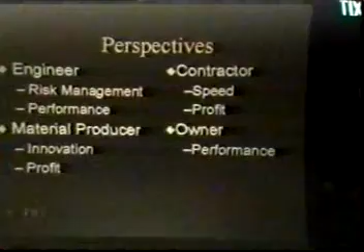I'm going to be talking from a contractor perspective. As you can see on this slide, there are many different perspectives that will be given to you today from the material people, the engineers, the contractors, and some owners. And certainly these perspectives need to be understood so that you can understand the biases.

Everybody has a bias in this business. The owner wants the cheapest, most effective repair. The contractor wants speed, he wants to make money. The engineer is concerned about the risk of his design, he's looking for performance. And of course, the material producer is looking for innovation, the one-upsmanship. He's got to develop technology that he can sell, and he certainly wants to make a profit like all of us.

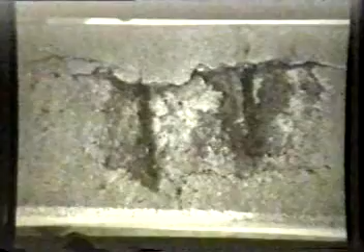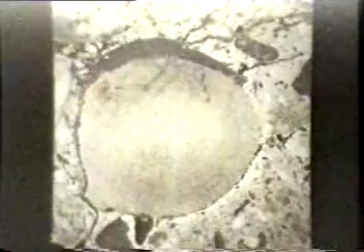This whole business about corrosion and repair starts with this type of thing, pretty common in most parts of the country, most parts of the world. It's all about this rebar and other embedded metals, where these metals want to go back to the way they were found in the earth to begin with, as an ore, an oxide. And these oxides expand, as you can see in this particular slide.

That's the corrosion product that we'll be talking about for the next 2 days. This corrosion product expands and creates tremendous forces, and these forces are tremendous, and they can do what you can see here. They can delaminate the concrete, and that's what this is all about.

As Joe Solomon said earlier, this is billions and billions of dollars being spent by us, the owners of these structures, to fix and repair them. So it's a great business. If you're in this room, most of you are profiting from this repair business. We develop technologies and materials to fix these things, and you're going to hear a lot about this today — the effect, the spalling, the corrosion, all kinds of strategies, means and methods and tools.

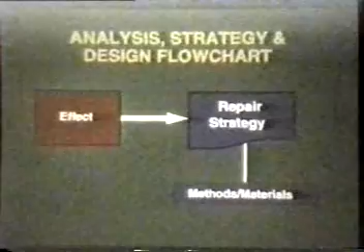It's pretty exciting because there's lots of neat innovation going on in this business, and a lot of it's related to the corrosion issue. We're going to be spending a lot of time this morning just talking about some of these repair strategies, some of the things we're doing, and I'm going to raise some questions and food for thought, because there are lots of issues with these different technologies. It's important to understand these issues so you, the user, can ask the right questions when you're presented with an opportunity to use some of these technologies.

We've learned a lot about corrosion over the years. We know that the corrosion process isn't just about water. It's amazing how many times, back in my earlier years in this business, I thought you needed water getting into the concrete, that water was causing the corrosion. Water is just a part of the process.

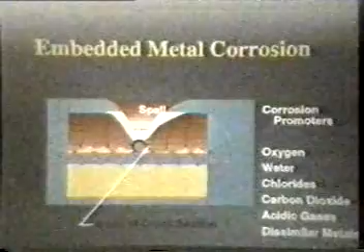Certainly oxygen and water, but we've also learned that chlorides and carbon dioxide are the two key elements. So you need certain things for this reaction to take place — that's something that we've learned.

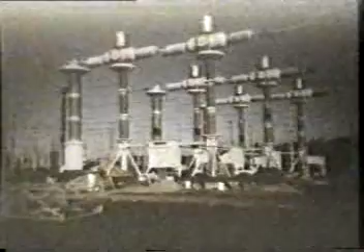We've also learned that this process is an electrical process, something that's really at the fundamental level very hard to see. These are electrons flowing, and we're going to hear some of the theory from some of the speakers later today and tomorrow. I know Dennis Pinnell and Gordon Gu are going to talk a lot about the theory and some of these issues, so you can understand — or get confused, as I do — when talking about electron flows.

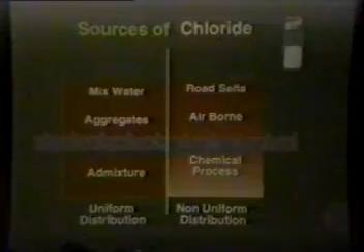We've learned a lot about these chlorides. Chlorides are great for our business, and we've learned a lot about where they come from. Some of it's coming from the outside, like road salts—where we have cold weather, we put a lot of salt on the road, and that comes into the structure via vehicles and so forth. Some is airborne. If you're on the ocean front, salt water—we were just talking before the meeting in Hawaii, they've got all kinds of airborne salts in the air. They also have a lot of aggregates they use in their concrete mix that have a lot of chloride in it. So we know there are different sources of salts that get into the structure.

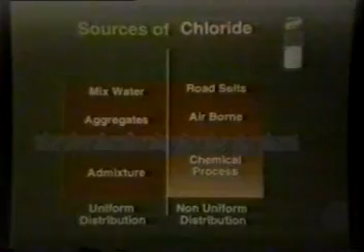We've learned over the years that the wonderful admixture used to accelerate concrete, calcium chloride, has created a lot of nice work for us. Most areas of the country prevent the use of those materials where there's going to be reinforcing steel. But in other parts of the world, we still see some use of these materials because it's a cheap accelerator.

We've also learned, maybe we're the latecomers in the United States, about carbonation. In Europe and other parts of the world where they have more mature structures, we know that carbonation, the gas in the air, is causing a lot of problems. It's a natural event that takes place where the alkalinity of the concrete, the natural protection for the reinforcing steel, is being lost to this acidic attack.

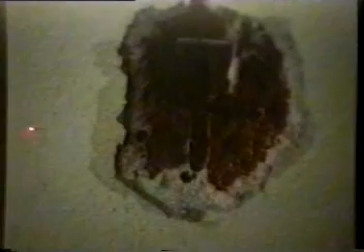This is a coating on the surface. It's really interesting to note that carbon dioxide goes right through this coating, right through this mortar surfacing that levels off the surface, right into this concrete, and travels right back into the concrete. It's looking for this reinforcing steel. Once this carbonation level reaches the reinforcing steel, you have lost the alkalinity, the natural protection. So now water and oxygen can cause corrosion.

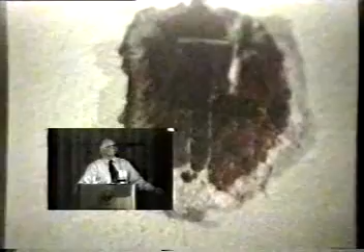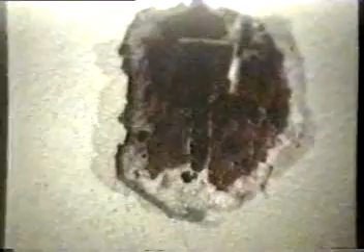You can also see that this crack on the surface, which penetrates the slab, allows the carbon dioxide to penetrate deep into the structure. You can see the white area around the reinforcing steel where the crack crosses that bar. So we've learned a lot about that in the United States, and that's going to be a future problem we need to be working on. Certainly this exists today in the United States, but we're going to see a lot more of it in the future. There are some new tools available.

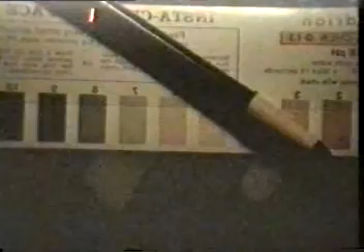This is something we recently found—a pencil. It's a simple little pencil, and you rub that across the surface of the concrete, and you check the color, and you can check the level of carbonation. Pretty neat—you don't even need to spray chemicals.

Something else we've learned about these materials, the chlorides and the carbonation, is that you can run tests individually on the carbonation level and on the chloride level and find out they're both within acceptable limits. But if you add them together, you have a tremendous synergy between the two. So you can have a very high pH where the concrete would come out pink in the phenolphthalein test, and have very low chloride content. A low chloride content by itself would not promote corrosion, but add the two together, and we have tremendous levels of corrosion taking place.

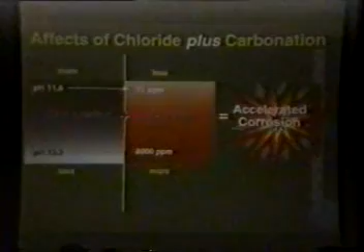So it's very important to find out exactly what the levels of these two things are in your structure if you're doing an investigation, because we've seen errors where they look at the chloride content alone and find out the structure is just fine, and don't really treat the cause of the effect.

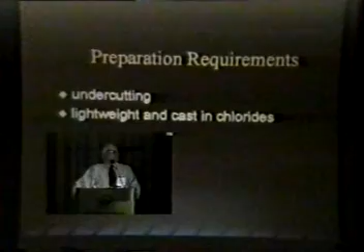I'd like to talk about preparation. Probably one of the most important things we've learned in the last couple decades is preparation. Preparation can lead to very successful repair work.

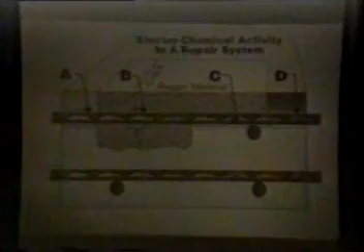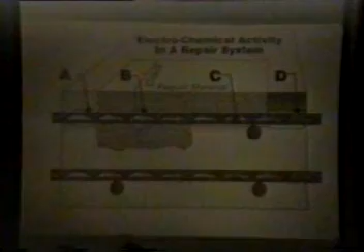I'd like to talk about a couple issues. One of the things that was pretty prominent in this business a couple decades ago was we didn't chip behind the bar, we just knocked the loose stuff off. You really didn't need power tools. You'd go on the surface of the building, take a mason's hammer, knock the loose stuff off, then go with mortar and trowel it back. No power tools, maybe some wire brushes.

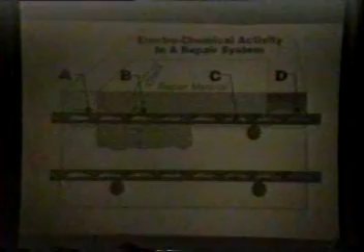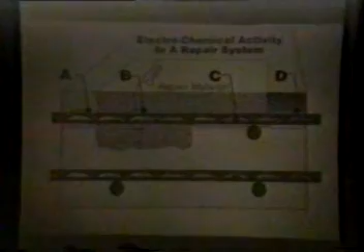These type of repairs, where it was done without chipping behind the bar, failed. Anybody in this business has seen this. One of the things we've learned is you've got to chip behind the bar. One of the first guidelines this association put out, back in '89, was the preparation guide for reinforcing bars that were corroding. This guide talks about chipping behind the bar. It really has helped the industry move forward.

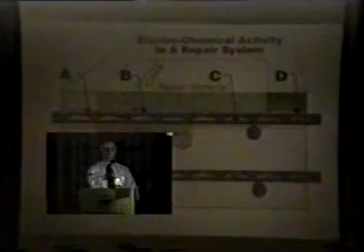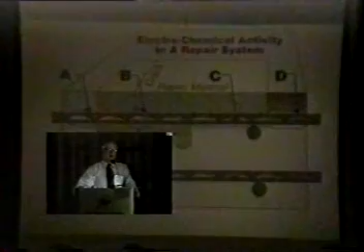You go to other parts of the world, like India for example, and I've talked to contractors and engineers over there - they don't chip behind the bar. Their repairs don't last. So it's a very important issue that we've learned, and we should not forget it. But it does cost money.

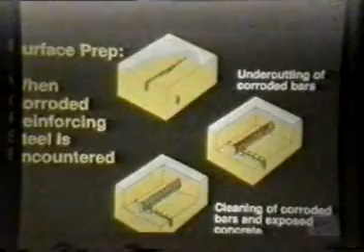And if you haven't seen these guides, they're available out on the table, and certainly you can take them with you for a few bucks.

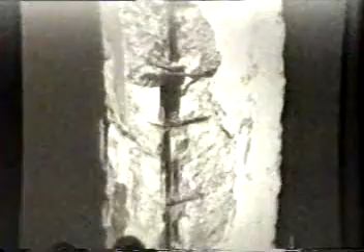This is a typical example of the type of problems you might see out there, where the tendency, if you want to do it at low cost, is just knock the loose stuff off, wire brush the surface, and trowel it on. If you do that, you end up with things like this. These are very short-term repairs.

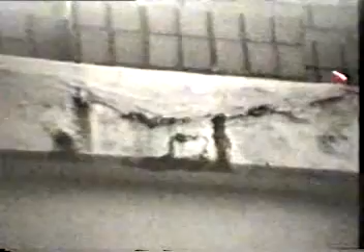This repair was done without chipping behind the bar. It lasted no more than 2 years. These are very tempting to an owner looking for the lowest cost. In this particular structure, the owner had to do repairs 3 times before he decided to spend the real money and do the job right.

These are just some more examples of what it looks like when repairs fail.

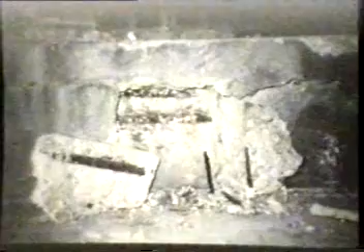Another thing I'd like to talk about in preparation - as a contractor, we've been put in a vice. We've been asked to bid these jobs lump sum, which is a very risky business. We go out there on these lump sum jobs with a hammer, sound the surface, and do a delamination survey. We get a quantity from the delaminations and put our price together. We add 10% to those quantities.

Well, in the last couple of years, we've been burnt. Almost every time we do that, we get burnt because we end up with these structures. This particular structure is typical, maybe of other types of structures too.

Typically, if you're using lightweight concrete in your structures, the delaminated area - the area that's hollow from the pressure of the expanding reinforcing steel - is not indicative of the level of corrosion. Many times in these types of structures, the lightweight aggregate actually absorbs the corrosion product. It's absorbed into the lightweight aggregates, which are very porous, so it doesn't build up the pressure to cause delamination.

So you can do a delamination survey and think you've got a reasonable area for repair, and then you go out and start chipping, follow the corroded bars, and your areas might double. Something very important here: if you're an engineer doing the survey or a contractor bidding on this work, you really need to understand what type of problems you have. Maybe a pilot test may be appropriate.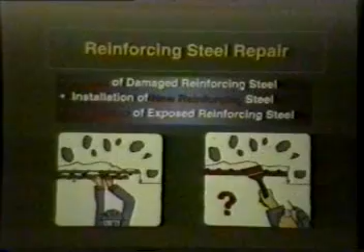We talk about reinforcing steel. Once we've exposed these things that have caused the problems, there's lots of issues, and you're going to hear a lot about it in the next couple of days. The repair of the bars, the coatings - there's all types of products on the market that repair bars. But first, before I talk about repair, I'd like to talk about new construction.

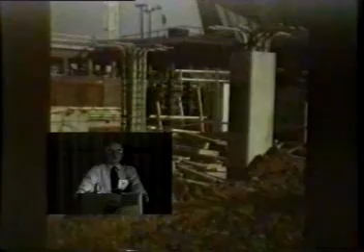New construction, over the last 20, 30 years, has developed technology to prevent corroding bars. In the 60s and 70s, they talked about galvanized bars, and then in the late 70s they started transferring the technology to a fusion-bonded epoxy coating. The value of those systems was to electrically insulate the bars, so if they're electrically insulated, we couldn't have an electrical process going on. That's pretty much the state of the art for new construction in bridges.

Certain states have banned the use of these technologies because they've had some problems. I think the state of the art right now has advanced to a point where, as you can see in this particular case, they use epoxy-coated bars in the columns, and the ties are uncoated. I still haven't figured out exactly why that is.

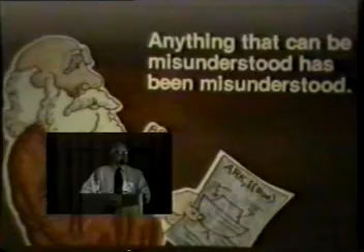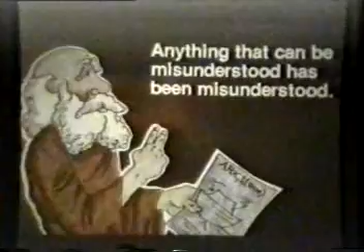I think that's true with a lot of technologies. We start applying these technologies, and then they start getting abused and misunderstood. And that's somewhat happening on our repair side. In the repair side we have a lot of issues, and I'm going to talk about a few of these.

The first issue I'd like to talk about is repair. A repair is part of the structure, not the whole structure. There's a big difference between new construction and repair. And you can see this bar has been exposed.

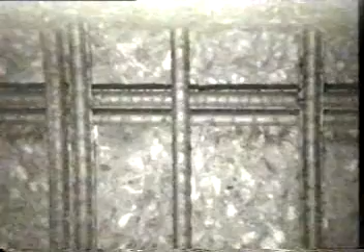This particular specification required white metal. That's why it looks so clean. If you ever try to blast a bar to white metal, you'll realize how hard that is to do. It's almost impossible. But think about this bar.

You can see this bar, but then it disappears. But there's a bar in that concrete, and what I'd like you to do is visualize that bar as being continuous. So it's kind of ludicrous when you start to think about it. In new construction, we want perfection of these epoxy-coated bars from end to end, tip to toe, stern to bow. But in repair, we can only hit the bar in the repair zone.

So does it make sense to encapsulate a bar in that repair zone and leave the bar uncoated as soon as it leaves the repair zone?

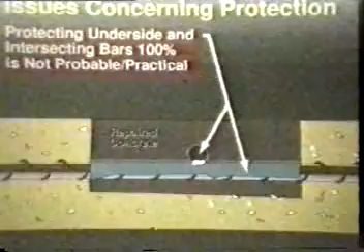And then we deal with the constructability of that. How do you coat it? I'm talking about epoxy coating now, where epoxy coating is an electrical insulator, and for electrical insulators to work, they have to be perfect. If you have a pinhole in it, you concentrate electrical currents. So an engineer that specifies this wants a pinhole-free, perfect coating system.

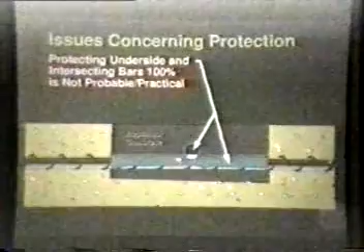But as a contractor, I can tell you it's very difficult to do this. On the back side of the bars it's very difficult. Where bars intersect, you have two number 8 bars lapping each other. You know how difficult that is? It's almost impossible. They're touching. There's going to be a gap there, uncoated.

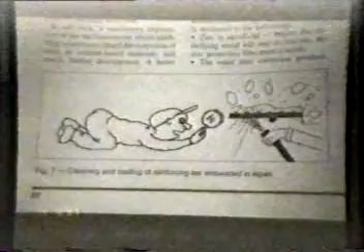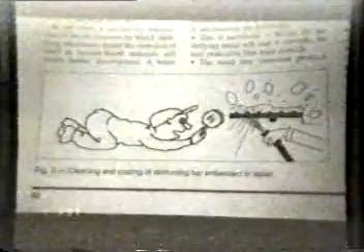So it really brings into question the issue of practicality, especially as a contractor - we're the ones at the end of the chain where there's a specification, and the specification requires these things. It's very costly to do. A recent job we did at the Baltimore Aquarium, the cost per square foot was close to $6 a square foot to blast and coat the bars because of the requirements of white metal, pinhole-free coating systems.

There are other systems available, lots of systems, lots of manufacturers in the hall next door make products to address these issues. In general, what I see is the epoxy coating systems have fallen out of vogue for repair and have led to different specialty coating systems based upon either alkalinity protection.

The alkalinity of concrete is a natural protection. It has a high pH, and that high pH is what protects the concrete. It causes passivation of the reinforcing steel and really protects the bar. So some of these systems are basically the alkalinity, similar to concrete, in a coating form that's applied to the bar. There's sacrificial zinc systems that are really passive cathodic protection systems that have been around a long time.

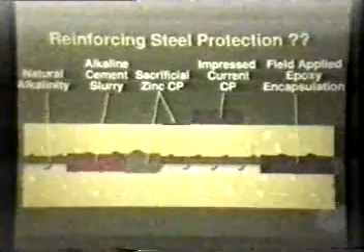And of course, we'll be talking a little bit later about the impressed current cathodic protection systems. What I just talked about earlier was the epoxy coated, field-applied epoxy coating system.

It's my view that we want to keep these repairs and the design of these repairs as simple as possible. There's less to go wrong. It's not that we want to do them with less work - we want things not to go wrong. And we believe totally in Murphy's Law, that the more you do, the more is going to go wrong.

So our preference is to use the natural alkalinity of the repair material. If we're using concrete, use concrete. In the last 27 years, we've never seen a failure of our repair due to corrosion within the repair material or where the repair material comes in contact with the reinforcing steel.

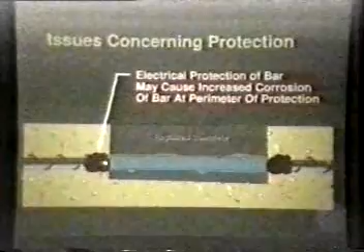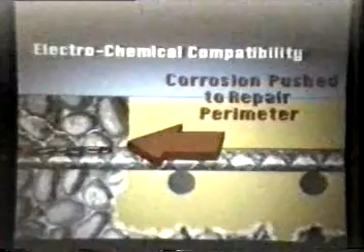There's a lot of issues with these coating systems and the whole repair system, and there will be other speakers today and tomorrow, especially Gordon Gu and Tate Coverdale, and I know Dennis Pinnell is also going to talk about this. There's a lot of issues with compatibility - electrical, chemical compatibility of the repair systems. You're going to hear a lot about ring corrosion, where the theory is the repair is causing the electrical current to concentrate right onto the outside of the repair and will cause accelerated corrosion.

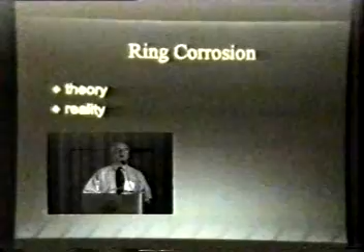There's a lot of theory and reality to this. As a contractor, we certainly see failures outside the repairs as the years go on after the repairs are installed. You see deterioration taking place outside the repair zone. The real question is: is this just a natural progression of the deterioration process, the same process that caused the problem originally now moved outside? Or is this accelerated corrosion on the perimeter? These are difficult things to put our hands on because it takes time, and time is what's really giving us the problem in understanding these mechanisms.

The other issue I'd like to talk about relates to these coating systems for rebars: the test data that manufacturers use generally applies a test method that's used for new construction. If you have epoxy-coated bar systems for new construction, there are test methods, a ponding test that ponds salt water and measures the current flow in the bars beneath. I know Dennis and others are going to talk about this specific test. But this test method is really designed for new construction. It does not simulate a repair situation where you have a repair material and existing concrete that's contaminated. So we get test data that supports the use of these products based upon new construction, and we have to be very careful applying these things to the repair situation because they're not necessarily indicative of it, nor will they guarantee performance.

I think that's really one of the important issues you need to walk away with: test methods. There's lots of test methods out there. We can produce data that can show almost anything you want to see, and that test data can influence your buying decision. So it's important to understand these test methods and their applicability to the repair situation.

So I think we've covered most of these issues: constructability, costs, the marketing issues. Manufacturers are there to bring new technology to you, and they're going to push the envelope many times. Many times these products come to market before they're tried and true, and many times we're the guinea pigs as users, which is okay as long as we know that, because that's the only way we'll find out which technologies work.

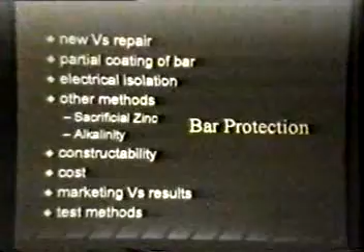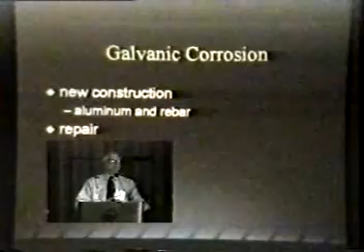Galvanic corrosion is another process we find in concrete structures that we end up repairing, caused by different metals within the concrete—aluminum and steel and so forth. Those things set up a galvanic cell and cause corrosion to take place.

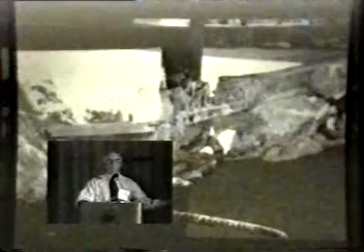It's great for the repair contractor—this particular structure is seeing $3 million worth of repair work, $3 million to take care of this one little detail. Why is it that the original designer, the structural engineer, the concrete contractor, the aluminum rail contractor, the aluminum rail producer—hundreds of people involved in this structure—none of them said anything about this aluminum being in this concrete? It's crazy. So in a repair situation, you've got to know what's going on here. You've got to learn that aluminum and steel don't mix.

And the repair situation, the repair design's got to deal with that. It's got to take the aluminum out, or it's got to isolate it electrically so that we don't have those problems.

Let's talk about cathodic protection. You're going to hear from a number of speakers, Ollie, Steve Daly, Peter Rubby, and Bruce Collins, different aspects about cathodic protection. And there's a lot of neat technology. It's very sophisticated. It's trying to fool the electrical current, basically. You're taking the current and fooling it so that it doesn't cause corrosion of the reinforcing steel.

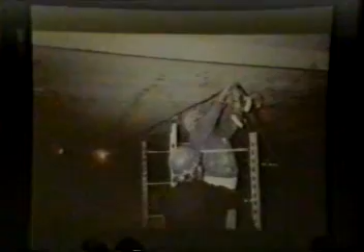These systems have been around a long time. They're generally, they cost some money. But there are some risks, and we've certainly seen them as a contractor. These systems don't always work.

One of the things I'd like to point out with any of these technologies is that you've got to know the downside. We talk about features and benefits all the time when we're looking at new technology. Here's the feature, here's the benefit, this is how great this system is. But if you're a user, you better ask some important questions. What's the worst that can happen if I install this system?

In cathodic protection systems, you can totally destroy a structure if it's installed, designed, or maintained improperly. And because these systems generally are sold on a 25-year payback, and maybe some of the cathodic protection people here will take exception to that, but that's what I've heard them say. It takes 25 years to pay back, to get a good benefit from these systems. So you have 25 years, these systems have to operate properly.

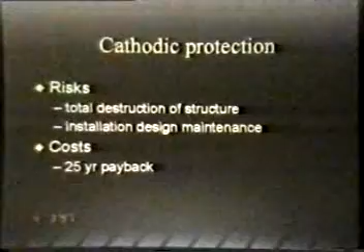And when you're pumping electricity into the structure, you've got to make sure it's going in the right places and doing the right things. In one of the structures we recently fixed that was cathodically protected, the system didn't have proper continuity, and that resulted in accelerated corrosion cells, like one of those tests in the lab where you're trying to accelerate the corrosion. It totally destroyed the structure. The slabs had to be removed. So here a system that was installed to prevent this actually did the opposite.

So it's very important. All you have to do is ask the question of the salesperson coming to your office: what's the worst that can happen if the system doesn't work properly? If he said to you, well, if it's not maintained properly, or it's not installed properly, or it's not designed properly, we can totally destroy your structure, the owner's going to say, well, tell me about that.

In this particular case, the contractor that installed the system had to pay for a lot of the replacement. He took the liability.

Inhibitors. You'll hear a lot about that, and certainly it's become very popular in the repair business in the last couple of years. Inhibitors are a neat technology. Here's something so simple and relatively low cost that we can add to the existing structure or into the new material that can really help us, in theory, deal with the corrosion problem. It's pretty exciting stuff when you think about it. Something coming out of a can like that, sprayed on the surface, that can actually inhibit corrosion.

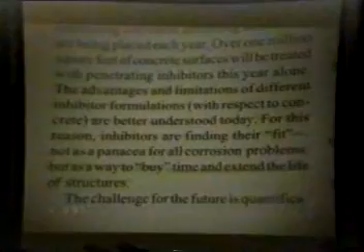In the October issue of the Concrete Repair Bulletin, Rick Montani wrote an excellent article on this technology, but I made a slide of one excerpt from that article, and I think it's really important, and I'll just read it here on the bottom. Inhibitors are finding their fit, not as a panacea for all corrosion problems, but as a way to buy time and extend the life of structures. I think that's really important.

None of these technologies are perfect, but they all have some benefits, and they all possibly can extend the life of the structures.

But what we have found with inhibitors, and I think this is the point I'd like to get across to you, is, and it's because I've asked the questions, what's the worst that can happen? How does this system really work? How long is it going to last? Those kind of questions have really made me come to question some of these issues.

How long, if we put these migrating inhibitors into the structure, how long will they last? I would ask you, and ask maybe the speakers that are going to talk about inhibitors later, to talk about this. But the answers I've gotten back from the manufacturers are maybe 3 years, maybe 5 years, maybe 7 years. We don't know. We don't know how long they will last. So here's a product that we're putting in the structure to enhance the value of this structure, but we don't know how long it's going to last.

And then I ask the question, how do I measure whether it's in there or not? If I can believe that it's not going to last forever, I need a system to monitor the penetration of this material and see if it's still in there. So the question I ask is, how do I measure it? Well, you take a core and take that core to a very special lab. There's only a few labs in the world that can measure that. Maybe things have changed since I got that answer, and maybe some of the speakers can address that. So we don't know how long it's going to last, and it's very difficult to measure. It's not something we can do in the field.

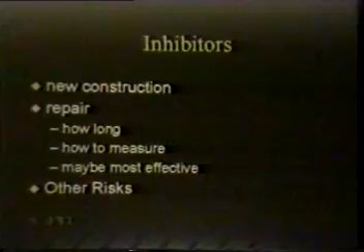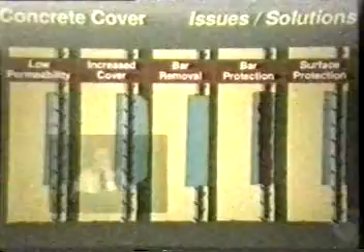Concrete cover, that's a big problem, and it's a big cause of many premature corrosion problems in structures. There's a lot of different technologies and strategies to deal with this lack of cover, and I've just listed a few here. You put this low permeable material in there. You can increase the cover. You can remove the bar. You can put bar coatings on it. You can put coatings on the outside. There's lots of neat technology out there to deal with this, and these are just some of the few.

It really surprises me when the state highway does something like this on a bridge pier. They've got these bars that are too close to the surface. They want to meet their own design requirements, so they build out the repair area and even put a coating on it. I just can't believe the governor of that state would allow such a thing. What is wrong with that structure from an aesthetic standpoint? I think there's better technology out there to deal with these issues, but that's not an uncommon thing to see going down the highway. We see it on buildings.

In some cases the client doesn't have a lot of money. He just knocks it off and puts the coating. He skips a step. But if we're looking at his concern with safety, public safety, stuff falling off a building, you've got to make it safe. He made the building safe. He stabilized the condition. It looks like hell, but this is not an unusual strategy.

We were talking earlier about a structure in Hawaii that's got cast-in chlorides, and the owner went through and knocked all that stuff off. It looks like, as it was described to me, like Beirut.

But what really surprises me, and this is not in our field, not in the repair side, is why in new construction there's nothing there to ensure that these bars are placed with the proper cover. There's nothing in the building code that requires any investigation as to the depth of these bars. I guarantee you, if the contractor had to give back money for future maintenance, he would ensure that these bars were placed with proper cover.

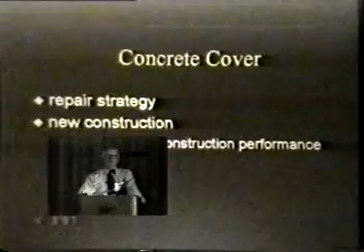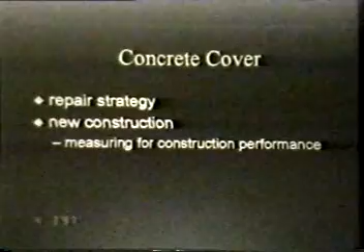So the question I have is not for the guys in this room, it's for the next meeting that follows this, which is the ACI meeting. Why isn't there a requirement to test and verify the cover of these bars in structures that are exposed to the elements? The contractors would do a lot better job. They wouldn't look the other way when the bars are too close to the surface. This is the biggest problem we have in the industry from a new construction standpoint.

We have all these requirements for testing concrete for its physical properties, right? Every job requires it. The building code requires taking strength tests. All we have to do is add one more line in there, and we can eliminate part of our business. But it would be good for the industry to be able to correct a problem that's so easily corrected.

These are just some examples. These bars are too close to the surface. Certainly the guy putting the formwork up knew that when he shoved the form in there and the bar was pressed up against the surface. There's really no excuse for these type of repairs.

Post-tension. There's a lot of post-tension structures out there, and if you're in that repair side of it, it's a great business. These are structures built with cables that are stretched with a lot of tension. There's a lot going wrong with these structures. Water's gotten into these systems and caused corrosion.

Just to point out, there is a task group here at ICRI that's dealing with the issues associated with these types of problems, and they meet at 1:30 this afternoon. So if you're interested, I recommend that you attend and participate and just see what's going on in the task group.

But one of the things we have found is that with these systems, what we thought originally was that there'd be telltales. When these cables broke because of corrosion, they would fly out of the slab. You'd see these big protrusions, cables, and things hanging out of the slab. And we said, oh, that's good, we know when they're failing.

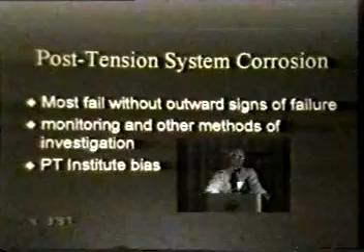But what we have found over the last couple of years is that most failures have no telltale. They don't show themselves, they just break. They probably break not quietly, but they break unobtrusively. They break and they stay within the structure. And that's pretty scary when you think about it. Here we have a time bomb taking place. We have a cancer within the body of the concrete without any knowledge.

It's very hard to investigate these things. So it's something we need to develop systems for, that will be able to monitor and make these structures safe. And one of the issues is that the Post-Tensioning Institute, which is the guiding body for this type of construction, has a bias.

We've seen this clear bias - a denial that this is not a problem. 'We don't have a problem,' they keep saying. 'It's only isolated to Calgary.' But we've seen it all over the United States, wherever these structures are built. So it's important that we deal with these things honestly, and make sure the structures are safe and develop technology to fix them.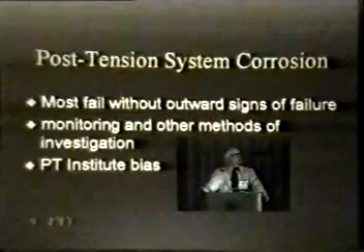So this is an emerging industry, with a lot of neat things to do to fix these structures. I'd like to end on a couple things that bother me - questionable repair strategies being used because they offer some perceived benefit, maybe low cost. I'm talking about strategies that deal with this corrosion problem. I'll show you a couple examples: epoxy injection, composite material wrapping of structures with corrosion damage, and some coating strategies being used.

Talk about epoxy injection. It's been around since the early 60s or before. This is a technology of pumping epoxy - there are people here who make equipment and materials for that, you can talk to them. It's a great system, a simple system, well accepted for re-gluing concrete back together, or waterproofing concrete in some cases.

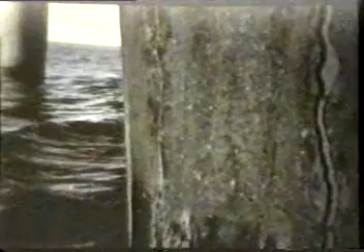But we find many contractors out there saying they can fix concrete that's corroding. A lot of these cracks are not just from movement - they're a result of delamination, which shows itself on the surface as a crack. If you have a crack, some contractors say, 'Yes, we can pump epoxy in there, glue it back together and solve the problem forever.'

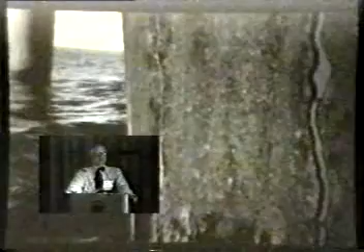From our experience, certainly you can pump epoxy into these cracks, and it costs a fraction of removing the concrete and doing a proper repair. But what we've seen time and time again is these don't last. They'll last a couple years and then redelaminate, because the epoxy cannot totally change the environment in that crack. You can fill the crack and remove some oxygen, maybe displace some moisture, but the process is going to go on - and that investment dollar is going to be wasted.

Maybe you can buy time. Maybe what this system should be sold on is, 'This is going to last you another 18 months.' But don't sell it on the basis that this is a permanent repair.

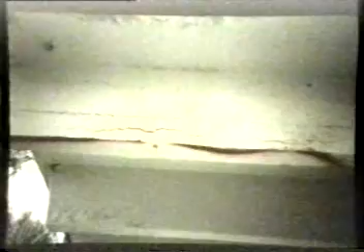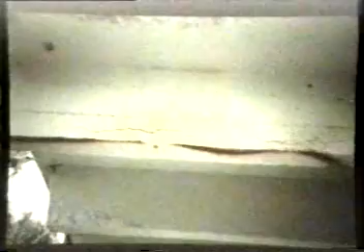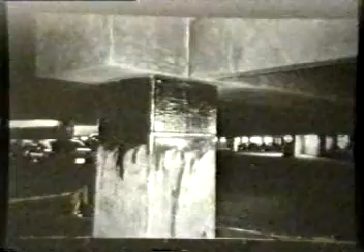Or how about this situation? Every time a new technology comes on the market, we start looking for uses - it's one of those 'I got a solution looking for a problem' type of things. We have the typical situation of delamination, a bar inside corroding. And there's new technology on the market - there's going to be discussion about that. Craig Ballinger tomorrow is going to talk about it, and there's going to be discussion with Mike Thomas, I think from University of Toronto.

He's going to talk about that. Is it tomorrow? Yeah. Here it is, tomorrow morning: uses of advanced composite material wraps for repairing corrosion-damaged concrete columns.

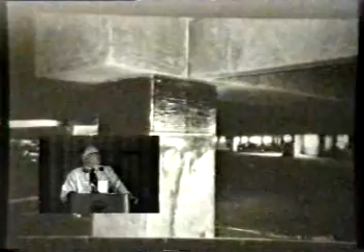This is really scary, guys. They're taking this technology that was developed for strengthening structures - and it's very good material, we've had good success with it to strengthen structures. But when we're saying we can contain the forces of this corrosion product by wrapping these high tensile capacity materials around the structure, we're really treading on dangerous water here.

Again, this is a solution looking for another market, and this is what we have to guard against. If we go out there and start using this technology to contain these forces, it's a very high risk business. Certainly we can put enough carbon around a structure to contain these forces, but what else is going on? Is that bar still corroding? Is that corrosion product building? Is the bar disappearing? Are we going to have a structural collapse without any warning?

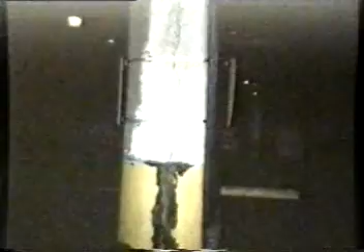These are the issues we're faced with, and certainly we have to guard against that. This is just an example of a steel plate around a column - you can see that crack coming down it. The steel plate was wrapped around it, and the expansive force of that crack caused the plate to split. Just to give you an idea of the forces involved.

So I challenge you to ask questions when you see these technologies presented to you as panaceas, as the newest solution, the newest innovation. We need to understand what they're all about. Certainly this paper tomorrow will discuss some of these things - there's research being done with this technology, but ask some tough questions of the speaker.

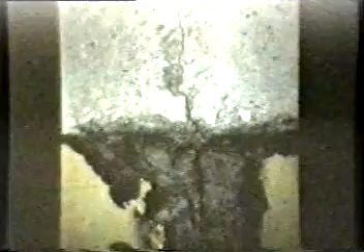What's that? You're going to get even, Greg? We're going to get even with you.

We see specifications on buildings to put sealers on these buildings, and sealers and coating systems are really good to protect the structure from future deterioration. But one of the surprising things we've seen on buildings is the specification where we're putting a silane sealer on the structure. This is a structure we've just fixed, and they're specifying a sealer to protect the structure.

When you're putting a silane sealer on the structure, what is it you're really doing? Are there chlorides? Is this a carbonation problem, or is it a chloride problem? If chlorides are coming in from the ocean spray, maybe the silane sealer is going to do a good job. But if we're dealing with a carbonation problem, what is that silane sealer actually going to do to protect that structure?

So we have specifications saying that we should put sealers on the structure, silane sealers, which are really chloride screens, not carbonation screens, to protect the structure. So I really question the selection of these type of sealers for something we're trying to remove, which is the cause of the problem. Certainly there may be some manufacturers here that can address that, either in their booth or in an answer to this question at the end of my talk.

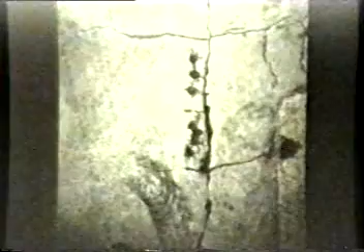It's a problem, and we've talked a lot about that over the years. Certainly when a repair material cracks, it opens up a canyon for these materials to go right back into the reinforcing steel. So we have a big issue with that. No matter how good this material is between the cracks, it's absolutely worthless if the cracks allow moisture and salts to penetrate it.

So I started out by talking about these perspectives. There's many perspectives, there's many issues. It's actually a pretty exciting thing because we're on the verge of understanding a lot of these things, and there's a lot of questions to be answered, a lot of questions to be asked.

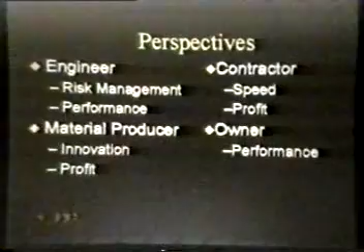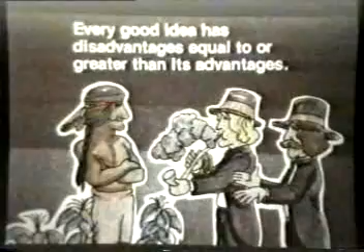A couple things I'd like you to remember when you're using these technologies: there's lots of data out there, and the data can show you anything you want to see, absolutely anything. So you need to understand the data, you need to understand the test methods. There's also a law I always believe in—if something's really good on one side, there's something you're giving up on the other. These are important things to remember.

These are some of the risks that you're involved with as a contractor, a material supplier, engineer, and certainly the owner who's footing the bill. Thank you very much. I ran out of time. No questions, thank you.

Steve Bailey with Corrpro. Peter, I disagree with your statement regarding cathodic protection where you indicated that the structure could be completely destroyed as a result of discontinuous rebar. In the case of an impressed current system where you have a rectifier, if you connect the anode to the wrong terminal on the rectifier, yes, then you can accelerate the corrosion dramatically. In the case of high-strength steel, you can have problems if you exceed the voltage for hydrogen embrittlement on high-strength steel.

But discontinuous steel is typically not a big problem with bridges. It can be a problem with parking structures. It should be connected in properly, but the voltage gradients are so low with these systems that the corrosion can be insignificant to create tremendous problems like you're referring to. I would suspect that the problem is just related to the fact that the system wasn't operating and it went back to its native state of corrosion activity.